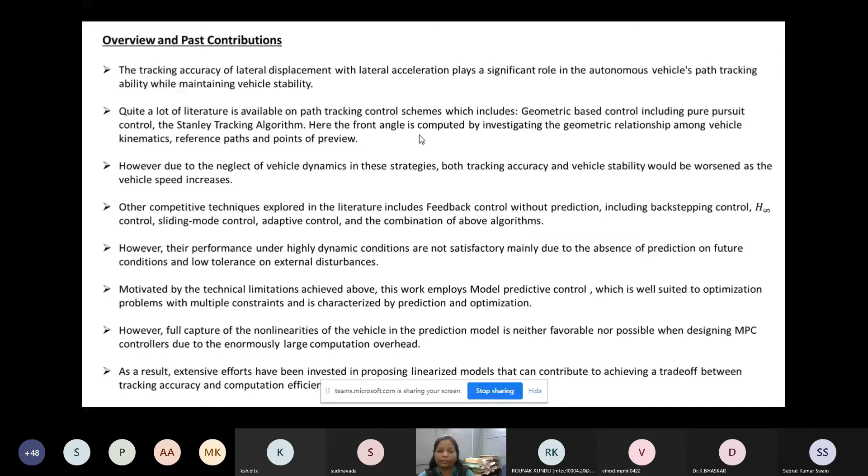I'm going to give you some contribution which is part of this work. This work proposes a conventional sliding mode controller design for lateral control of autonomous vehicles. The vehicle model considered here is a 1 degree of freedom bicycle model. Since we are designing a sliding mode controller, one can also go ahead with designing a PID controller, which you can try out in the lab session. But we can take into consideration two different types of controller.

Let's consider that we are taking a nonlinear controller, which is sliding mode. The sliding surface, the most important part in the design of a sliding mode controller, takes into consideration the lateral offset of the vehicle. This is one thing we can discuss right now in the lab session: whether we take only lateral offset, or heading error also into consideration. We can work on both aspects. We can take lateral offset as sliding surface, or both lateral offset and heading error as the sliding surface. Someone can take the lateral yaw rate also as one of the sliding surface.

Then the road curvature is the input to this system, and this road curvature also acts as a sort of disturbance which affects the motion of the vehicle. We can try it out with different road curvatures and see how the system responds, how it behaves as the road disturbances or road curvature changes.

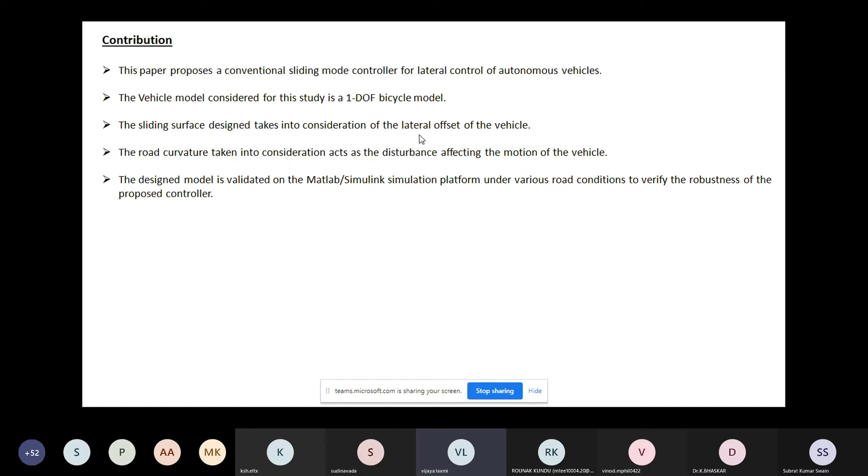The design model will be validated on MATLAB/Simulink simulation platform under various road conditions, meaning when your road friction changes. You can check it with high friction, wet road, slippery road, or snowy road, to verify the robustness of the proposed control.

This is a schematic of our lane keeping scenario, where you would like to maintain the vehicle on a particular lane. The inputs to this system are the road curvature and the constant longitudinal velocity Vx. You have the environment vehicle, shown in bold color, and the states output from the vehicle are the lateral offset, heading error, lateral velocity, and yaw rate.

The lane offset dynamics are nothing but the derivative of your lateral offset, as well as the derivative of the heading error. Heading error is given as psi e, which is nothing but the heading error.

This goes to the sliding mode controller. You always want your lateral offset to be near 0; the reference lateral offset should be 0. So your lateral offset coming out from the vehicle gets fed as a feedback path to the positive sign. Since the reference is 0, the error comes to the sliding mode controller, and your sliding mode controller is designed in the way shown.

The sliding surface is nothing but e dot plus lambda into e, where lambda is a regularized parameter which is the user's choice, chosen according to your specifications. Your steering angle will be nothing but the equivalent steering angle plus your discontinuous steering angle. Now I will give you an exercise to find out the equivalent steering angle.

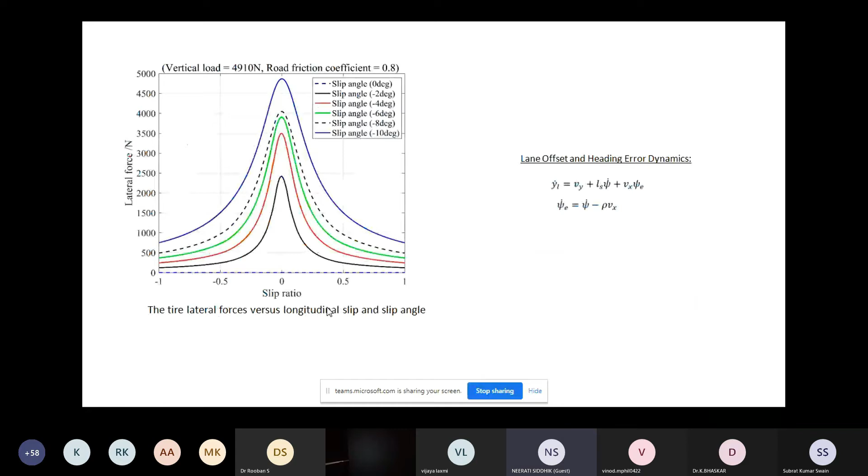The vehicle dynamics is being given here. Especially this d beta by dt and dr by dt, these are the two equations that you will be taking into consideration, and the other two equations will be this yl dot and psi e dot, which I have mentioned over here. Please go through this model and work on it in Simulink, and tell me if there is any problem. If anyone is interested to do it in MATLAB code also, they can write it down. I have done the Simulink part, but if anyone wants to write the code, they can do the same thing — no problem, both will give the same results.

Don't take the banking into consideration, okay? This g sine phi by vx should be 0. Don't take that g sine phi by vx. Just take the basic model.

Block would be this. In Simulink, your vehicle model will be these two equations, that is d beta by dt and dr by dt. This will be the vehicle model, and the extra two dynamics will be given by this yl dot and psi e dot, which is lane offset dynamics. So first design these two, and then we can go ahead with designing SMC.

But that SMC needs pen and paper. You guys have to actually work on that pen and paper. Then only you will be able to find this delta EQ, that is equivalent control.

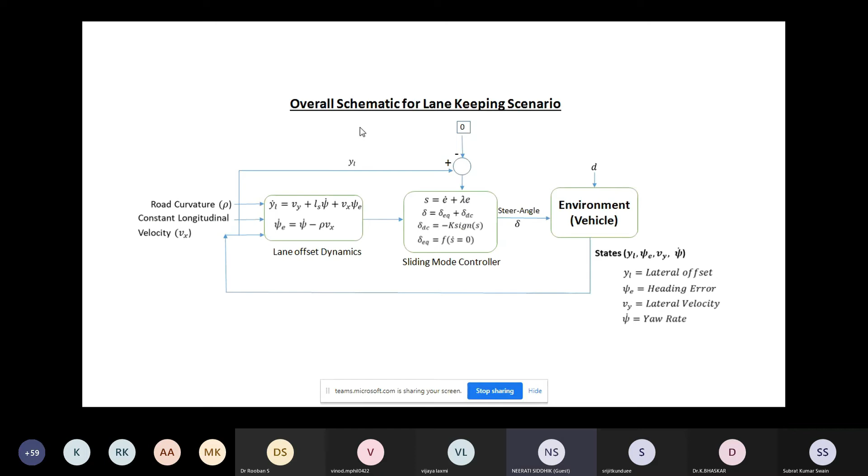So here we see - is it visible, everyone? Yeah, that's it. Okay, so first of all, go to Simulink, and in the Simulink, open it. When you go here, you have something called a Simulink library. This is 2013 MATLAB. Once you open the Simulink library, there will be something called new window. In that new window, you will be able to open this. If you guys are facing any other doubt, let me know.

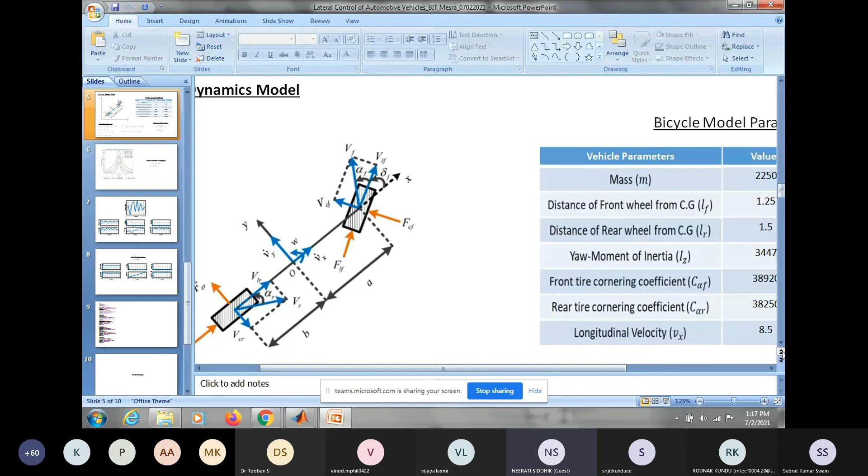So sorry, you have these two equations, okay? d beta by dt and dr by dt. Fine, so let us first of all look into this one. First let's design d beta by dt, then we'll go with dr by dt. Okay sir, so you see, I don't know if even if I zoom it, it will not be able to visible. I think this is a little bit.

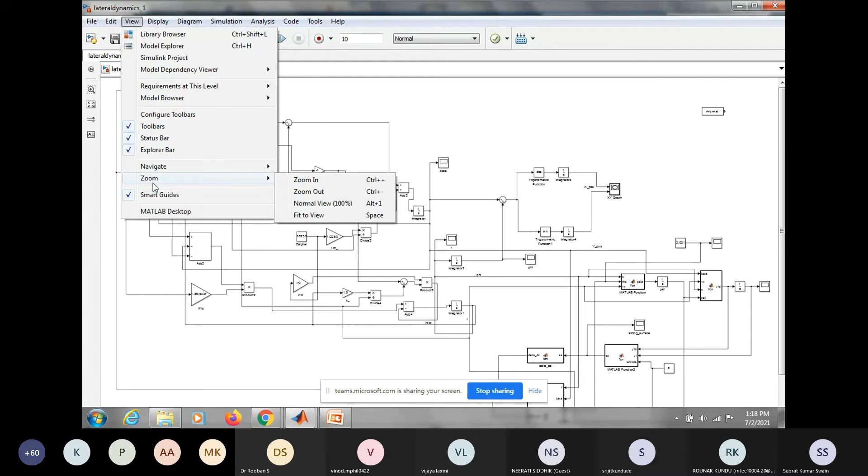Just wait a minute, let me see. Control plus - okay, you guys are able to see it now, this one. Yes, sir, it is visible now.

Yeah, so this is your rate, okay, and this is slip angle, that is beta. So if this is beta, then what should be this one? Can you tell me if this is beta? Beta I'm getting it after integration of this. So what should be this value? This value should be d beta by dt, na?

Hello, is everyone getting it? Yes sir, it's derivative of the - yeah, so the derivative when integrated will give you beta. This is derivative. So if you look at the derivative part, the derivative is nothing but the combination of these two parts, that is this one, that is minus r, then this c alpha f by mvx, and then c alpha r by mvx. There are three components which on addition will give you d beta by dt. So here you see, first part there are two parts, okay, three parts.

Okay, let me first go for the first one. Here you see this particular part - if I look into it, you see what is the dynamics that you have. You have something called C alpha R by MVX into minus beta plus LRR by VX. Just focus on this particular part only. Okay, C alpha R by MVX.

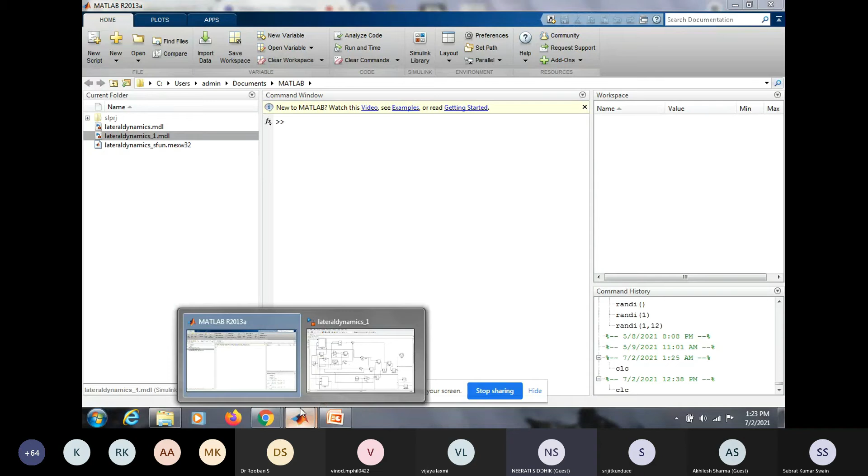So once you get this particular value, let's consider this particular portion, the first term. So in the first term, what is the first component of the first term? That is nothing but minus R. And the minus R is coming out from here. You see, this is R, and the R is coming from where? This portion, that is your rate. This is where your R is coming, and this R is multiplied with minus 1, it becomes minus R.

So minus R goes here, and then you have this two term, this particular term, and this particular one, delta minus beta. So you already got this value, minus R. Now this is the value. So before that you have to first identify what is this value, that is C alpha by MVX.

So you have C alpha F, this value, and this is divided by M, and then this is divided by Vx. You look at it, this is divided by Vx. So you have C alpha by MVX, which goes here, and that gets multiplied with what? This value, delta minus beta minus LFR by Vx. Now that has to be multiplied by delta.

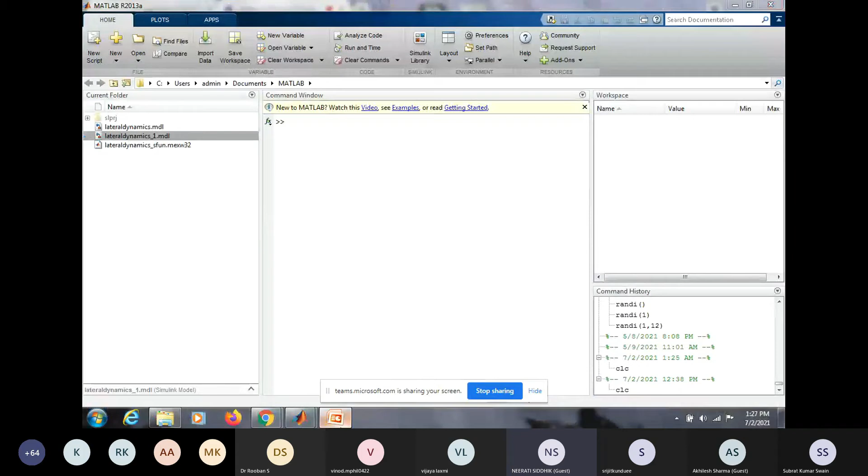You just take it as a constant value and substitute. Right now, let's consider that you are not designing any sliding mode control. Let's consider that you are just taking delta to be a fixed value, 0.3, and then taking that, please design this model. So first we have to assume some constant value, and after that we have to design. Yes, first take delta as 0.3 and design these equations.

Okay, sir. And then after you have designed, execute it, and we will verify the results. No audio, sir. Is it audible now? Hello, yes, audible. You first design it, and then I will execute my MATLAB Simulink simulation, and we will verify the results.

And for this one, road curvature, take this road curvature value. If you guys are having it, take the road curvature value as 0.001, this value.

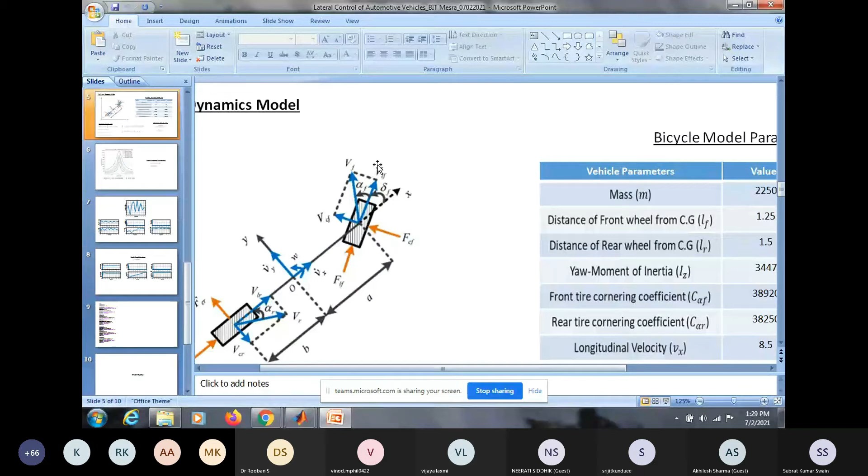Hello, yes. Students, are you able to get some idea from it? I'm actually going to demonstrate one small exercise, same thing.

Sir, please demonstrate because still can't do it. Okay, fine, no problem, still stuck. Okay, no problem, I'll show you. So let me actually have a look.

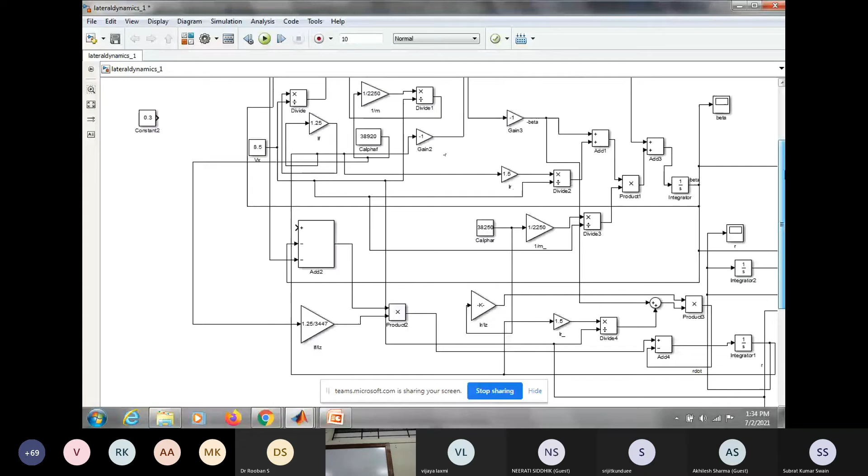Actually, I will just remove this delta. I will take this as a steering angle, this 0.3, and anywhere else where delta is required. Yep, looks fine, so this one is okay. And delta value has to be this one. Okay, so let's run it.

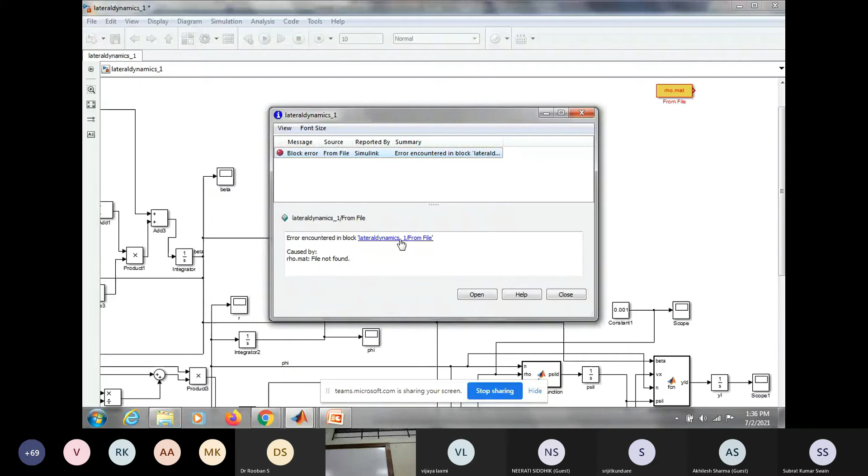Just wait a minute. Okay. Fine.

Did you see now the plot? This is the XY plot. This is the plot of your position of vehicle in the x-axis with respect to position of vehicle in y-axis. Everyone got the idea?

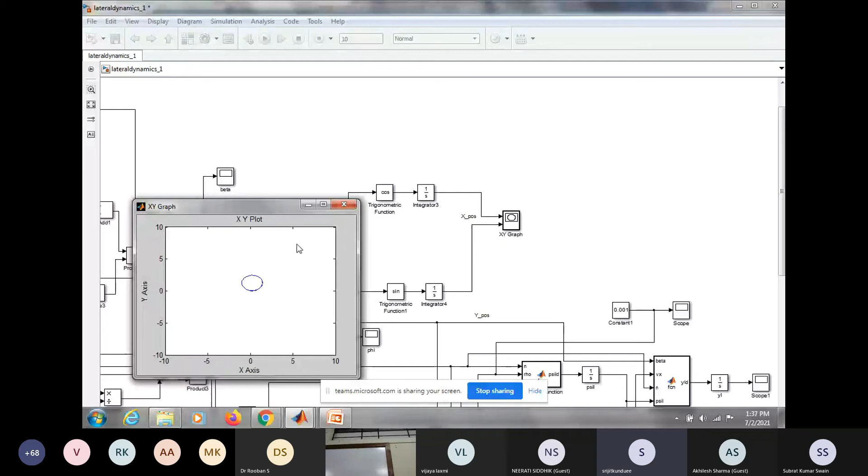Hello, yes sir. Now you look into this one. Okay, so let's consider the slip angle. And here, what have you done here right now? Here you have taken the steering angle to be constant, 0.3. Okay, so now you see the slip angle.

You see this one, you see the slip angle. Okay. So just look at the slip angle and tell me what should be ideal if a vehicle is moving on a road. Do you want the vehicle to slip? No, sir.

So you see that here when the vehicle is moving with a constant steering angle, how much is the slip angle in which it is settling down? Minus 0.04, right? Yes. Okay, so that means, but it should be ideally 0. It should go down to 0, or it should oscillate around 0. Okay, fine, but what is happening right now is that it is maintaining a constant offset of 0.04.

Why? Because we don't have the requisite control to bring this slip angle near to 0. Got the idea? Okay. Sir, can you repeat this one again?

Okay, tell me. See, here you are using a constant steering angle, 0.3. Now, because of this constant steering angle, just think about it physically. You are driving a vehicle, and you have turned the steering wheel to a constant angle, 0.3. That means your steering wheel, the left steer wheel, is turned at a certain angle which is 0.3. So what will happen? It will always stay at 0.3 now.

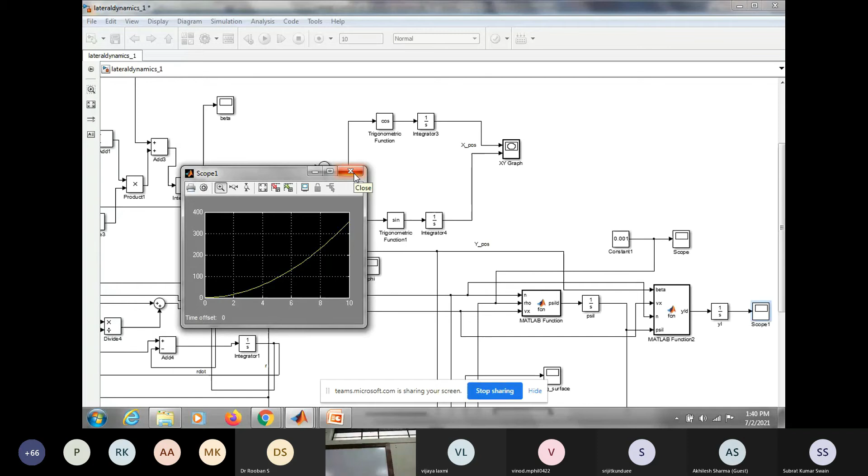Okay, because lateral offset increasing means what? The vehicle is diverted, it has completely diverged from its reference position. Reference position should be 0, but it is going to 400. Okay, that's because your steering angle is not controlled, it is uncontrolled. It is a fixed steering angle which doesn't allow the vehicle to come back to the reference position. Okay, so this is the lateral offset, this is the problem. And then what is the steering angle that you get?

Okay, I haven't actually added this steering angle. Let me add this steering angle here, and I'll execute it once more. We'll see. Okay, here you see.

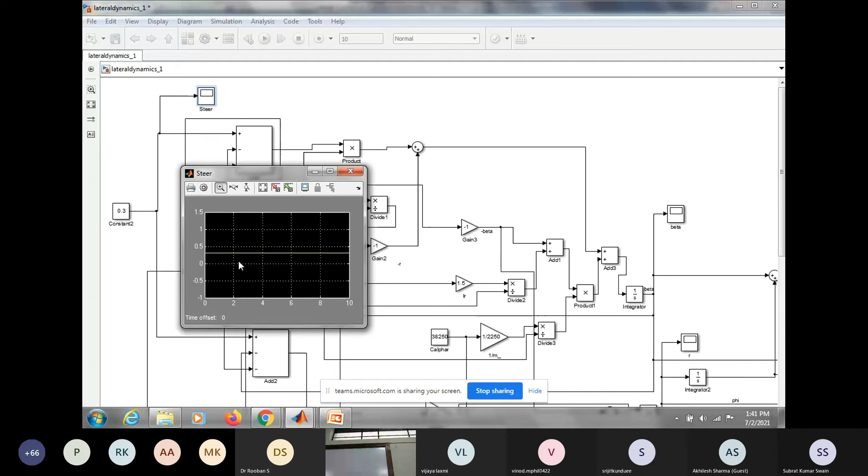Okay, the steering angle is by default 0.3. This is quite simple, 0.3. Okay, fine. So now the question comes here.

So I wanted to ask you one question. If you drive your vehicle at 0.3 steering angle, what are the things that you noticed? What are the problems that you faced? Can anyone tell me?

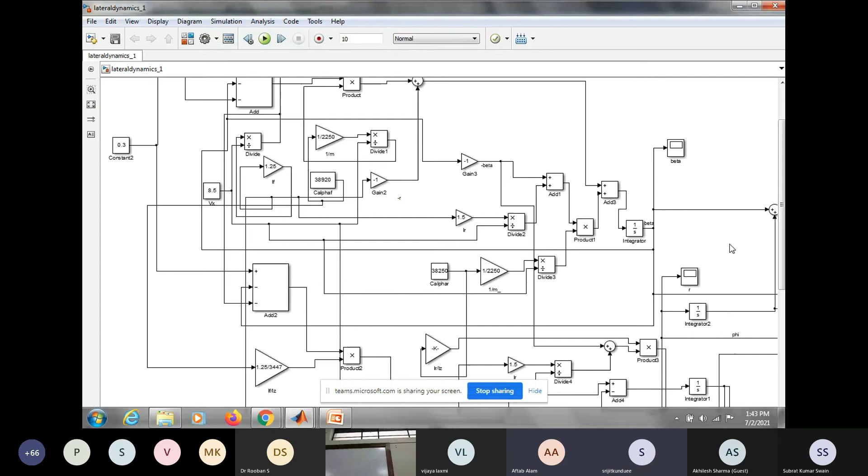Okay, so thank you. So if you look at the yaw rate, the yaw rate was also not controlled. This happens basically because you are not controlling your steering angle. This is happening without the design of a controller right now. This is the uncontrolled portion. So this actually gives us an indication that we need to design a suitable controller.

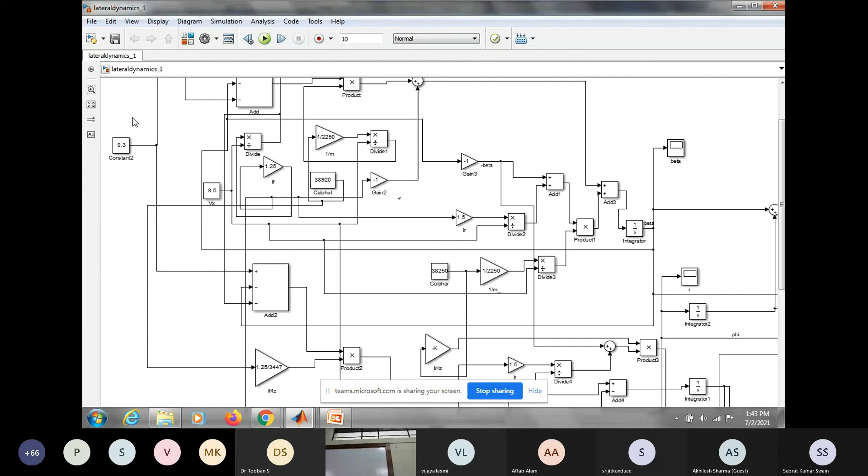Okay, fine. So the next portion will be how can we design a controller for this particular small exercise. So now let's go ahead with this controller design.

Now here I have taken YL to be the lateral offset. The error will be nothing but equal to YL minus 0. 0 is the reference trajectory. You want your lateral offset to be 0 reference.

So the error E will be nothing but equal to YL minus 0, so will be YL. So the sliding surface will be nothing but YL dot plus lambda times YL. Lambda is the user specified constant which you can design. I will show you in my simulation what value of lambda I have taken. We can take different values of lambda.

Okay, and that we will demonstrate later. First of all, you understand this. So the sliding surface will be nothing but equal to YL minus 0, YL dot plus lambda times YL.

So if S is equal to this value, how will I get the equivalent steering angle? Equivalent steering angle will be nothing but the function of S dot equal to 0. That means if I first solve S is equal to E dot plus lambda E, and then find the derivative, equate it to 0, and separate the delta portion, whatever is left behind will be equal to delta equivalent.

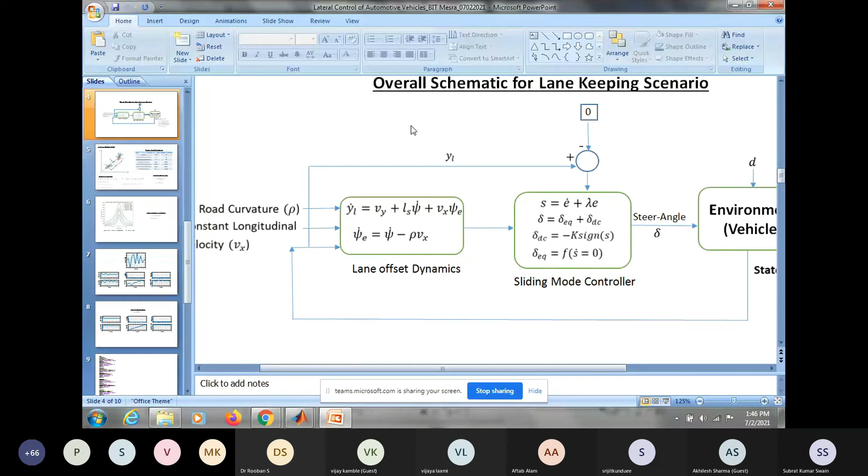Okay, here you see you have this beta, right? So if you multiply this beta angle, this beta side, that is the side slip angle beta, with Vx, you will get the lateral velocity Vy. So instead of this Vy, you can write beta multiplied by Vx.

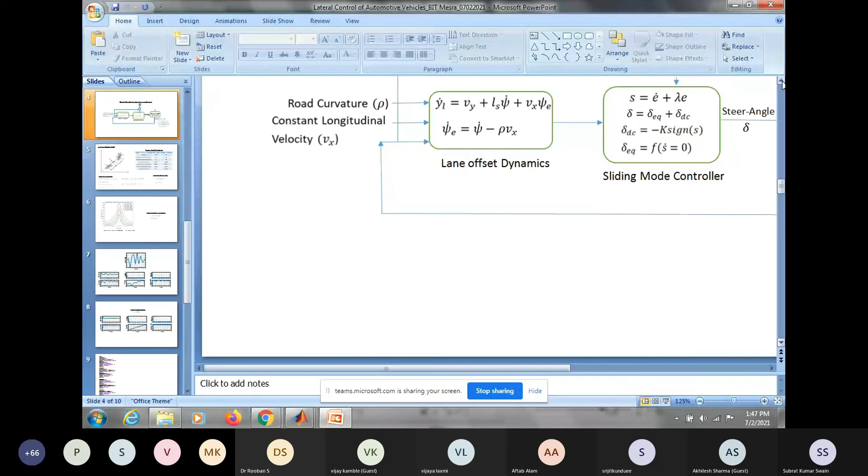So please do this exercise. Find S with respect to YL. So it will be YL dot plus lambda YL. Then equate S dot equal to 0 using these dynamics and find out delta EQ. Then I will go for the next part. You do it on pen and paper, and once it is done, let me know. I will switch over to Simulink.

Students, every one of you understood the concept, right? This is the equivalent steering angle, which you will get by equating S dot equal to 0. And after you find it out, I will discuss the discontinuous steering angle, which will actually control the discontinuous portion.

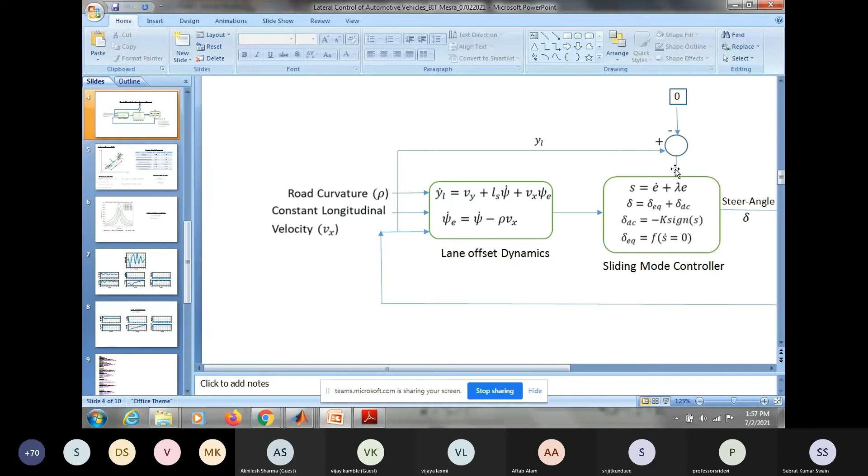See, according to our figure, where is that figure? This figure, right? So what should be the error? YL minus 0, right? So here you see, error will be nothing but YL minus YL ref. What is YL ref? YL ref is 0, so the value will be YL. So your sliding surface will be nothing but S equal to derivative of error plus lambda of error, so it will be given by YL dot plus lambda of YL.

So what will be S dot? S dot will be YL double dot plus lambda of YL dot. But what is YL double dot? It is a derivative of this portion, so it will be beta dot Vx plus LSR dot plus psi L dot Vx, plus lambda YL dot. YL dot is again this value, so you get this thing.

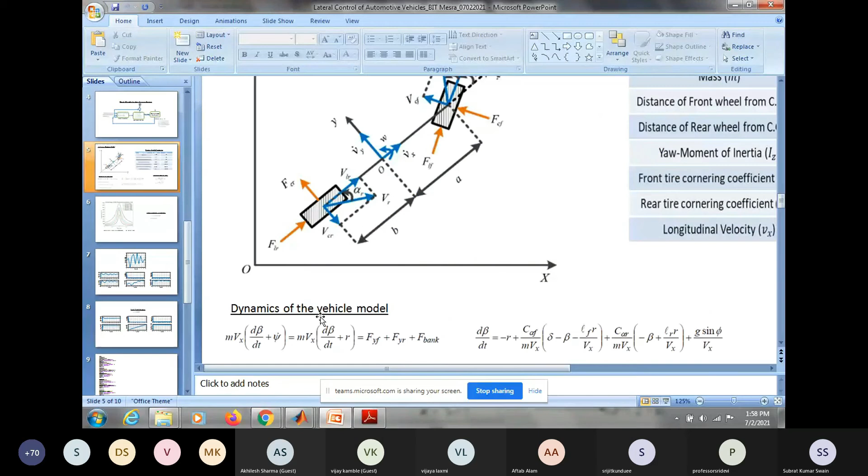So what is S dot? Now, beta dot is what equation? Can anyone tell me what is the beta dot value? I have shown you here, right? This expression is beta dot, and this is R dot. So substitute that value of beta dot here, up till this portion, and substitute the R dot portion here.

Then psi L dot. Psi L dot is this value — instead of N, write R, that is your rate. Substitute it here, psi L dot Vx. Then lambda beta Vx, lambda LSR, and lambda psi L Vx. Substitute everything here, and you have to make S dot equal to 0. So when you make S dot equal to 0, take the lambda value to one side, and express all other terms — minus r, then plus minus beta — and all other terms, that will be equal to 0. Everyone understood this portion?

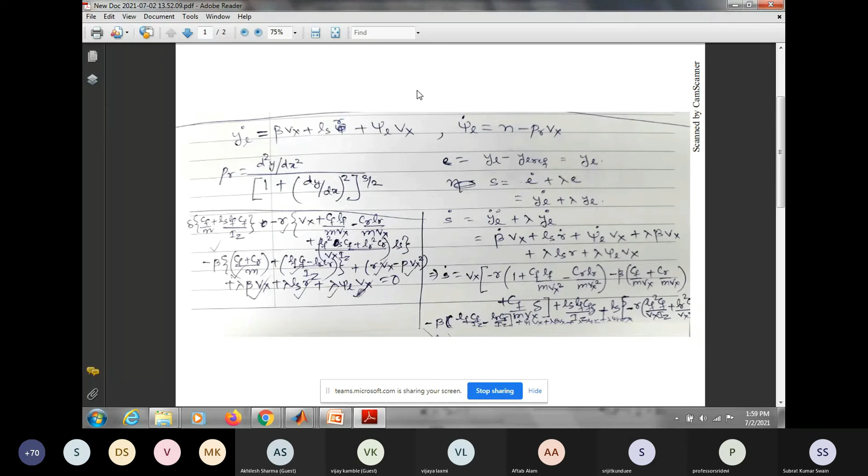Okay, because this is the most important portion of sliding mode control, because other things are quite easy, but this is the one which is important.

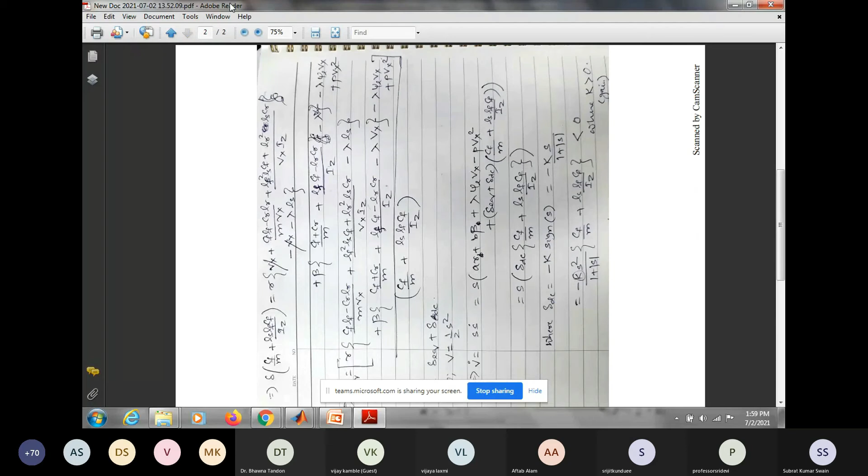Okay, so after that you take the steering angle to the left side and compute, and take the others to the right hand side. So you will have delta EQ equal to, take this one to the denominator, you will have this expression. This is such a long expression. Now this is the equation.

There will be some terms because of the disturbances that will not be taken care of by this delta EQ. The rest of the other terms will be taken care of by delta EQ. Taken care of means that will get cancelled. Delta EQ will be able to have a cancelling effect on the other terms apart from disturbances. So how will we take care of the terms which are affected by disturbances? That will be taken care of by delta DC, which is called discontinuous control.

Understood? Okay, so if I want to find out what is the value of discontinuous control which will take care of those disturbances, yeah, anyone?

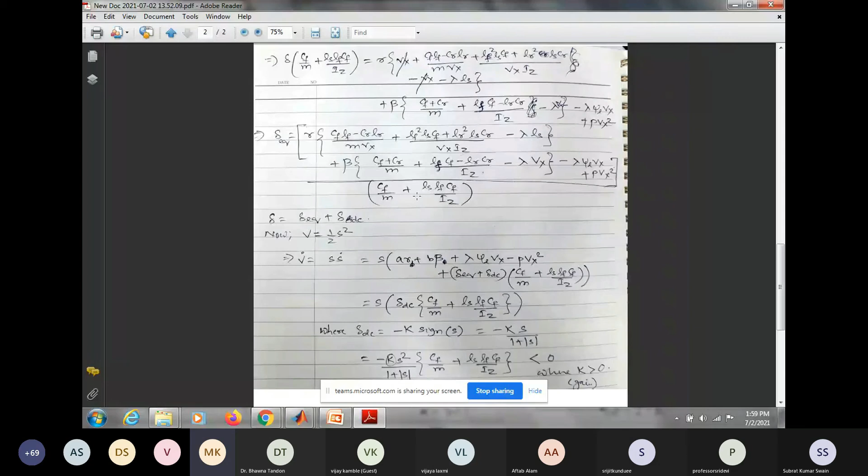Your screen is not visible. Oh, this is not visible. Wait, just wait a minute. Oh okay, I haven't actually shared this one. Wait a minute, let me see. Is this visible now? Hello? No sir, it's not visible? Okay let me do it again, just wait a minute. Is it visible now? Hello? Yes sir, visible.

Okay, so now you see you got your error, this value YL. YL minus YL ref value is 0, right? So you get YL. So your sliding surface will be nothing but equal to E dot plus lambda of E. So what is E dot? E dot will be YL dot plus lambda YL.

Okay, and then find the derivative of S. So you will have YL double dot plus lambda YL dot. YL double dot will be the derivative of this portion, and this will be nothing but beta dot Vx plus LSR dot plus psi L dot Vx plus lambda beta Vx, all this value. Okay, and then you group all these values.

Now what is beta dot, which I have already shown in the vehicle dynamics, right? Substitute that beta dot value, substitute the R dot value, substitute the psi dot value. Psi will be R minus rho Vx. Okay, this is R. Substitute that value, then put all these things together, and group all values under lambda, under delta. Similarly R values, beta values, and all other expressions are equal to 0.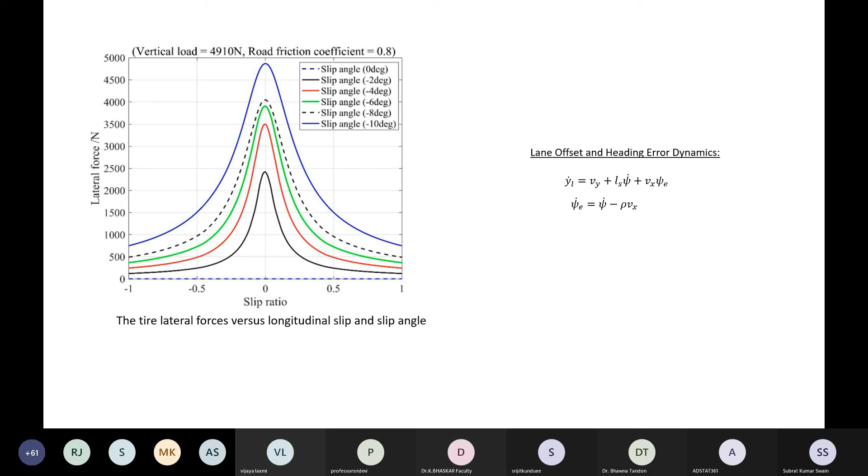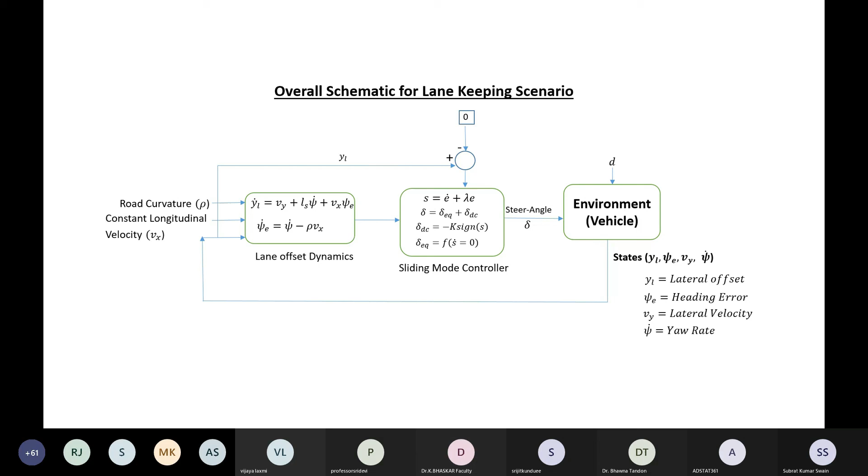Now this is the one where you are to find the sliding surface. What was the equation of sliding surface? Can anyone tell me? If you look at the expression, what was sliding surface? Sliding surface was E dot plus lambda of E, right? Okay, fine. So E dot plus lambda of E. So you have to find derivative of E, and lambda is the regularization parameter multiplied by error. So you get sliding surface S. This expression is being designed here.

In this expression, what are the parameters for which you need S? If you look at this sliding surface, here, S value, you need YL dot, that is the derivative of YL, lambda value, and YL value. So these three parameters are required to find S. So you have YLD, YL, and lambda. And lambda, how much have I taken? 5. So you get sliding surface.

Once you get sliding surface, what will be the discontinuous control? The discontinuous control is minus K times signum of S, or minus K S by 1 plus mod of S. That is what is being expressed here. So you get delta, that is discontinuous. And to find out the equivalent portion, how much is the equivalent? Is this big one. Okay, this big expression, you design it here, and you add both of it. Delta this and delta this. You add both. When you add it, it becomes your delta, which is the actual steering angle.

And that actual steering angle goes here. You see, this actual steering angle and this value. Understood? Okay, got the idea?

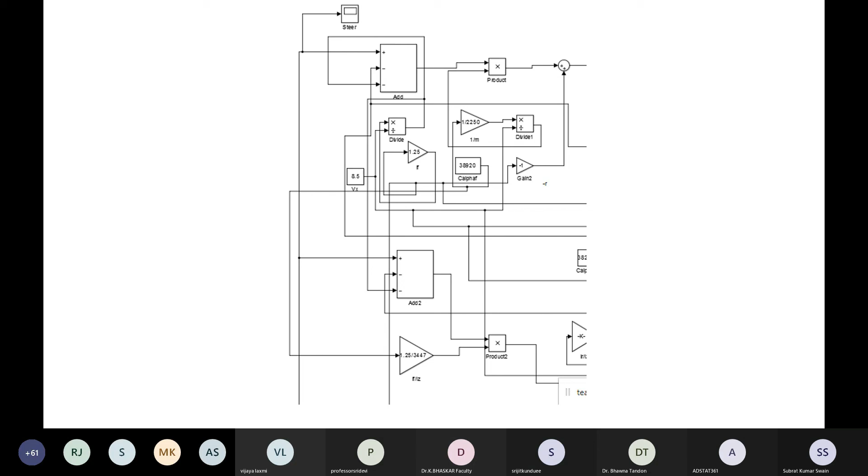Now, let us now see what happens. Earlier we saw that when we are putting a constant value, it was not tracking. The lateral offset was getting very higher value. Slip angle was not coming to 0. Now let us see how the expressions come now. What are the figures right now?

So I have already plotted it. I will show you now. So you see, when I am actually taking the fixed road curvature as 0.001 with sliding surface, now you see, if you look at this particular portion, okay, that is the, what is it actually? I can't actually look at it. Just wait a minute.

Okay. Hello. Hello. Hello.

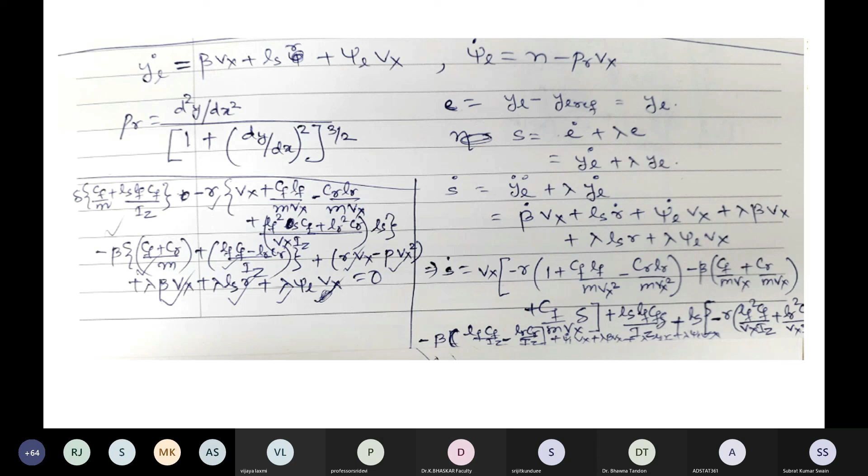Okay, this is the effect, this is how you are able to design a sliding mode controller for controlling the lateral motion of the vehicle. This is with fixed road curvature, rho equal to 0.001.

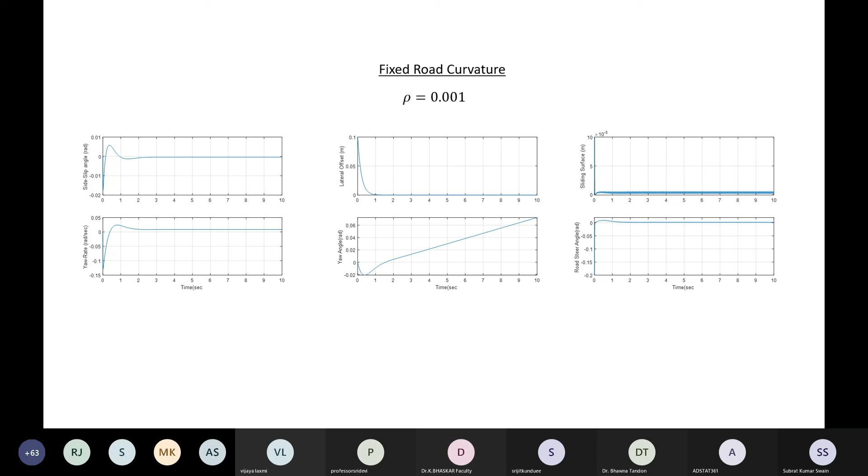Yes, sir. So what did you infer from all this from the design of controller? Can anyone tell me? What did you all infer? What was the difference between when the controller was not designed and when the controller was designed? What did you see? What did you infer?

We see set point tracking and disturbance rejection. These are the two main effects of the controller. So based on different road curvatures, you are able to control the motion of the vehicle, make the lateral offset near to 0. Other parameters like yaw rate, slip angle, all are coming within range.

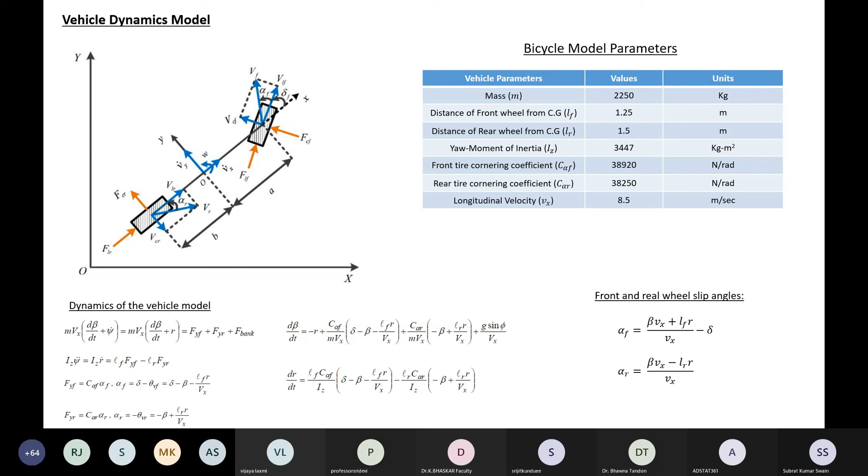So try it out. Put the value of mu as 0.7 or 0.4. Of course you have to change your equivalent control, delta, since the mu terms will also come into that equivalent control. Change accordingly and see whether your responses are coming as expected, with constant road curvature. If you change the value of mu, what does that actually act as?

It acts as a sort of disturbance. That extra decrease in mu comes out as disturbance, and that will be taken care of by the sliding mode controller. I wanted to show this, but unfortunately it is not getting visualized. I'm in MATLAB, no one is able to see my Simulink, right?